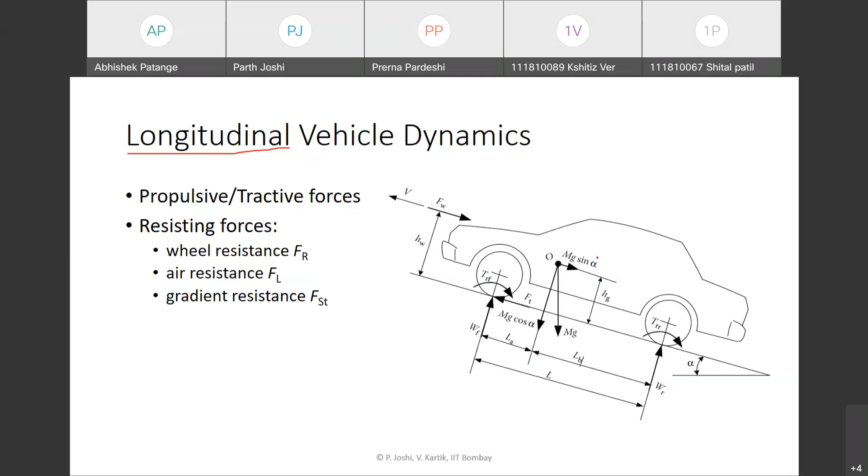So now we will see each of these forces in more detail. First we look at the wheel resistance, which is also called rolling resistance. It is basically the resistance to the pure rolling motion of any wheel. This force arises because of the particular material behavior of a tire. Tires are made of rubber, which is a viscoelastic kind of material, and because of this particular behavior and deformation of the tire, this force arises.

So normally if we have a properly inflated tire - sorry for the bad circle, assuming it's a circle - if it is lying at rest on the road, let us say this is one of the tires and the vehicle has four car tires, then there will be a certain portion of the tire which is in contact with the road. It will be a small area of the tire which is slightly flattened out, the way it is shown in the picture.

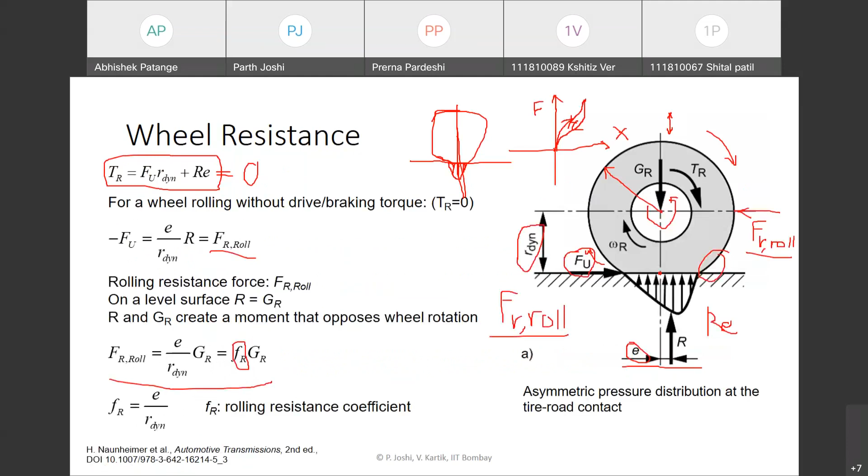So from the previous derivation, if we similarly try to derive the rolling resistance force, it will come out to be Fr into mg cos alpha, which is the component of the weight along the direction normal to the inclined plane.

This rolling resistance coefficient is found to be approximately constant for low speeds. Normally we do not encounter very high grades, so generally the road slope is gentle, and the gradient is expressed as a percentage, basically tan alpha expressed as a percentage.

So if the grade is generally 10% or lesser, the value of alpha is about 5.7 degrees. Because of this small angle, the value of cos alpha is nearly 1, so for practical purposes, we can ignore this effect if it is a gentle grade.

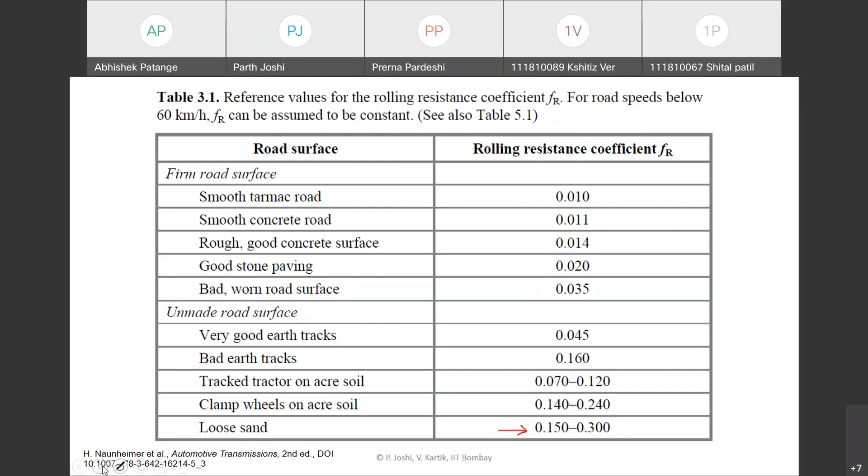So can we proceed? Yes, sir. Okay. Yeah.

So another force is the air resistance. When a body moves through any fluid, let's say if a car is moving through air, then while moving through the air, because of the motion and the particular shape of the vehicle, there is a certain amount of air that is being displaced, so the vehicle pushes some air aside.

Let's say the air was pushed out when the vehicle was here, then the air was pushed out. When it has moved forward, this air will try to come back into that zone. So then there is a kind of vacuum, or a low pressure region created on the backside of the vehicle, whereas the air in front is pushed forward, creating a higher pressure zone, like it compresses the air.

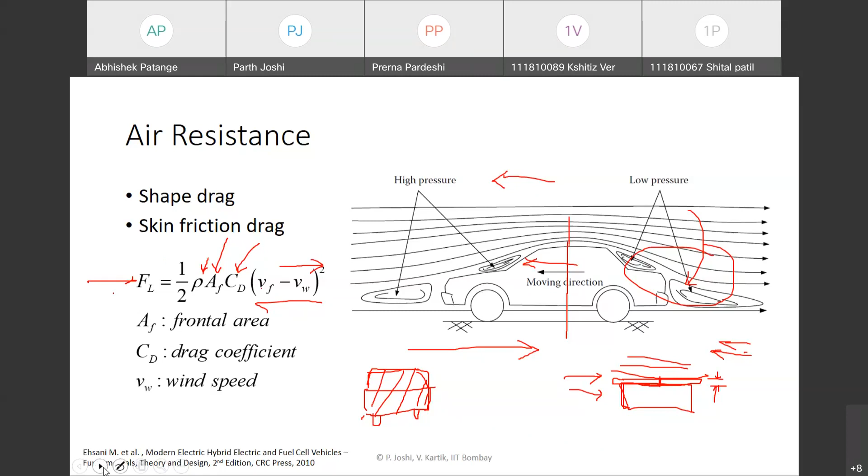If we look at the typical values of the drag coefficient for different kinds - let's say if it is a motorcycle with a rider, generally the drag coefficient will lie in the range around 0.5 to 0.7. If we have a flat plate, which is opposite in direction, then the drag coefficient associated with this is nearly 1.

If we have a small, smooth geometry and a small frontal area, then you would generally tend to have a lower drag associated with that. So generally companies try to make the shape of the body as aerodynamically efficient as possible.

So let's say we consider vehicles like passenger cars - Mercedes or Porsche. They have a relatively lower drag coefficient, like about 0.3 or so.

Whereas buses generally have a flat plate kind of geometry. If we look at the frontal area, the drag coefficient would be substantially higher, up to about 0.8 or so, because of the kind of box type shape that the bus body has. So these are the typical drag coefficient values for different categories of vehicles.

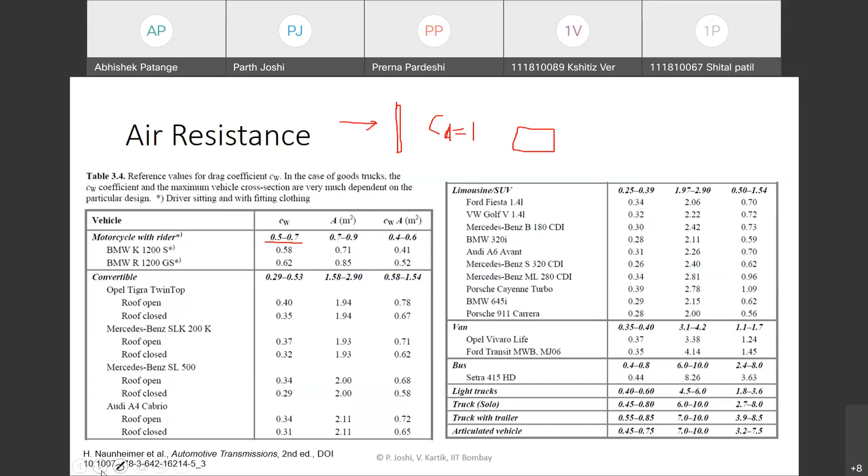So another force that we encounter is the gradient resistance. When the vehicle moves along an inclined road, let us say alpha is the angle of inclination. The weight of the vehicle would always act in a vertically downward direction.

If we resolve the force, like the weight, in a direction normal and along the inclined plane, there is the component of the weight which is along the direction of motion, which is mg sine alpha. In this case, because it is moving up the road, the component of the weight is actually opposite to the motion, so that also causes some resistance to the motion.

If the vehicle was moving downhill, then this particular component of the weight will actually act in the direction of the motion, so this will actually assist the motion.

So these are some typical gradients that we encounter, these are for Europe. These are the maximum road gradients that we can encounter in some of these countries like Germany or France. There are some cases where there are steep slopes like 26%, but typically even a gradient of 10 to 12% is also considered very high for a vehicle to climb.

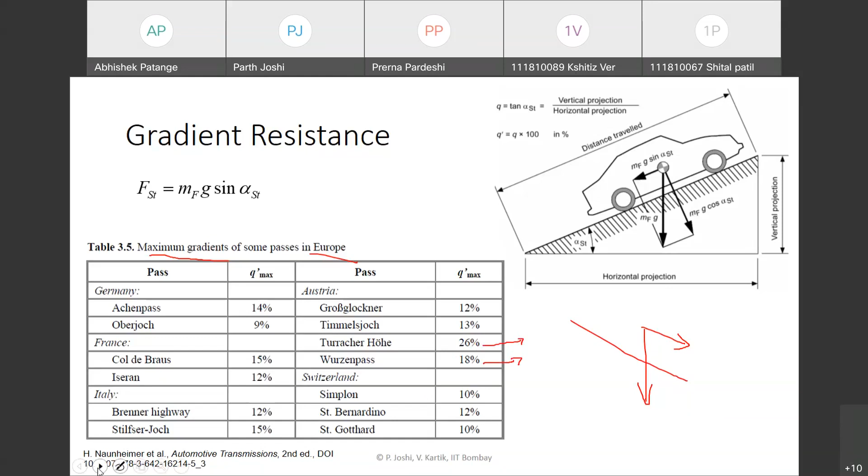So now, till now, we have seen what are the resisting forces, which includes the wheel resistance or rolling resistance, then the force due to the gradient, and also the air resistance.

Now, if we try to write the equation of motion of this particular vehicle, we will apply Newton's second law. Here we consider this vehicle as a lumped mass with some mass m. So the mass into the acceleration will be basically the net force acting on the vehicle, which is the difference between this tractive force acting at the wheels, which arises due to the power source, and the resisting forces.

So here we introduce a factor lambda. Since we are considering this particular vehicle as a lumped mass, we also incorporate the effect of inertia of rotating components. There is certain amount of inertia and certain amount of work done in rotating these components like the IC engine, transmission, and differential, and there are many rotating components throughout the vehicle, throughout the drive line.

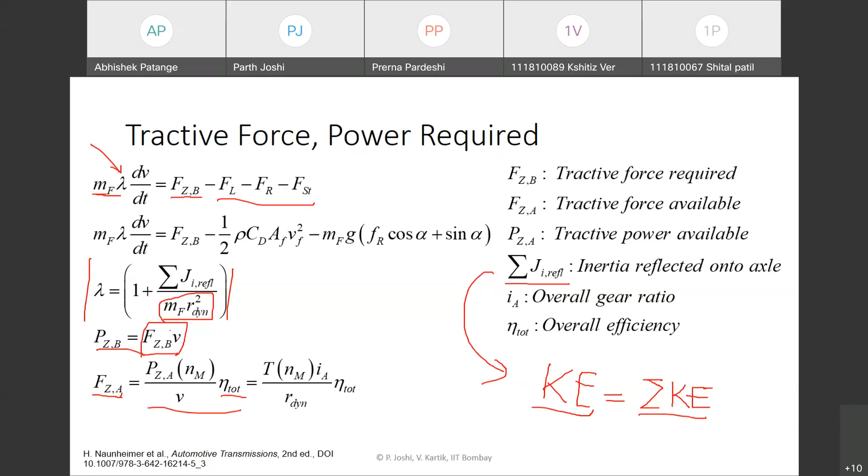This gives us an idea of how significant the effect of inertia is in different gears. In the first gear, the gear wheels required to provide the higher gear ratio are substantially bigger, and that has a higher inertia associated with it. The inertia scales as mass into r square, so as the size of the gear increases, the inertia will significantly increase. For the lower gears, the inertia effect is much more significant, whereas for the higher gears, let's say fourth gear or even fifth gear, the inertia may not be that significant.

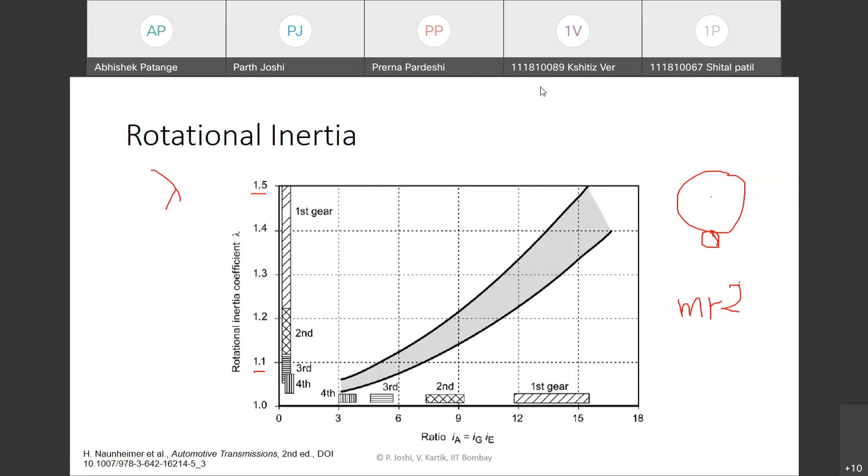Hello. No doubts, sir. No doubts, sir. Yeah, fine. Yeah, thanks.

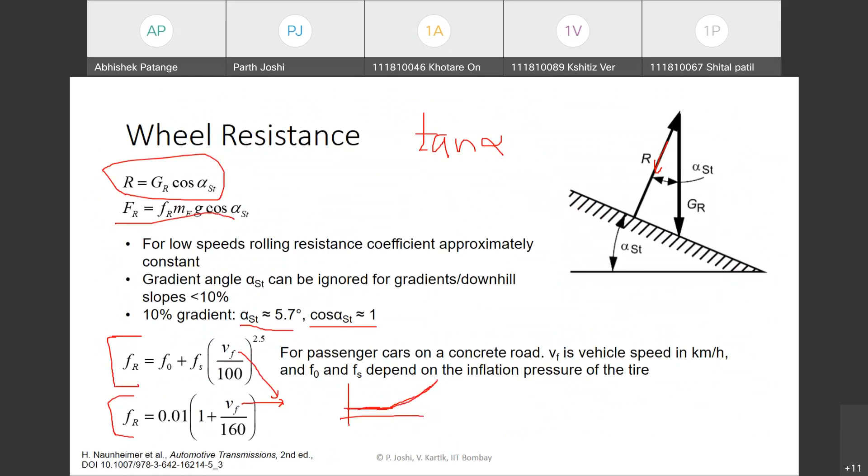The rolling resistance force is largely independent of the vehicle speed for lower speeds. But as we looked at the rolling resistance coefficient expression, for low speeds it's somewhat constant, and then later it increases rapidly with greater vehicle speeds. So that would be the nature of the rolling resistance force, this particular force Fr, let us say.

Then the air resistance force is directly proportional to V square, the velocity square. So there is a quadratic nature, a parabolic nature to the rate of increase of the air resistance. We can see that these kinds of curves are parabolic in nature.

With increasing gradient resistance, we will need significantly higher and higher amounts of tractive force required. For different grades, the gradient resistance will be independent of the vehicle speed. It only depends on the road inclination and the weight of the vehicle. We neglect the reduction in the weight of the vehicle as it moves at constant speed.

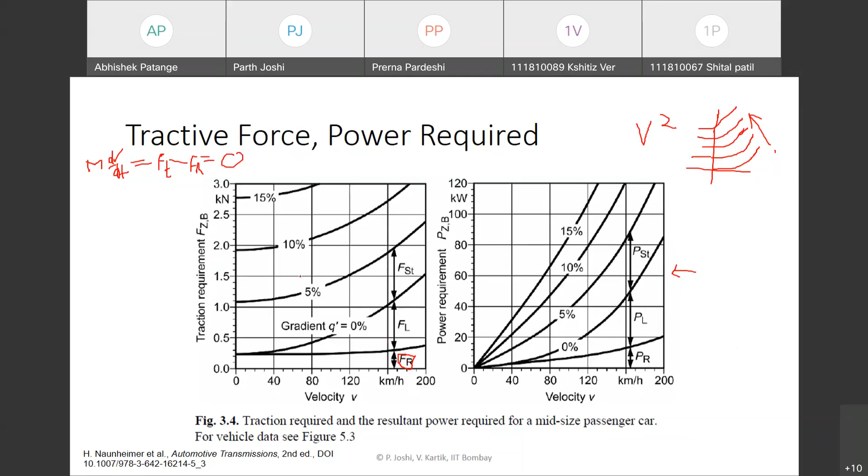So then the tractive force exactly balances the resisting forces. This plot basically shows this type of characteristic, so the sum of the resisting forces is what is being provided by the power source.

As I mentioned earlier, there is a maximum force that can be transmitted by the tire and road surface, through the contact patch between the tire and road surface. It can withstand a certain amount of maximum force, which is governed by the adhesion limit. There are adhesive forces at the contact patch which are responsible for this particular propulsive force.

This particular limit of adhesion is given by a tractive force coefficient, or static coefficient of friction. Normally we will have the static wheel radius, which is the distance from the center of the wheel to the road contact plane when the wheel is at rest. And we have a dynamic wheel radius, as I mentioned earlier - the distance from the axis to the tire road contact patch.

So we have a phenomenon called slip, because of the deformation of the tire material. If it is a freely rolling wheel - let's say a rigidly rolling wheel - traveling on a certain flat road, assume there is no slipping. The velocity of the center of mass would be r into omega, where omega is the angular velocity of this wheel.

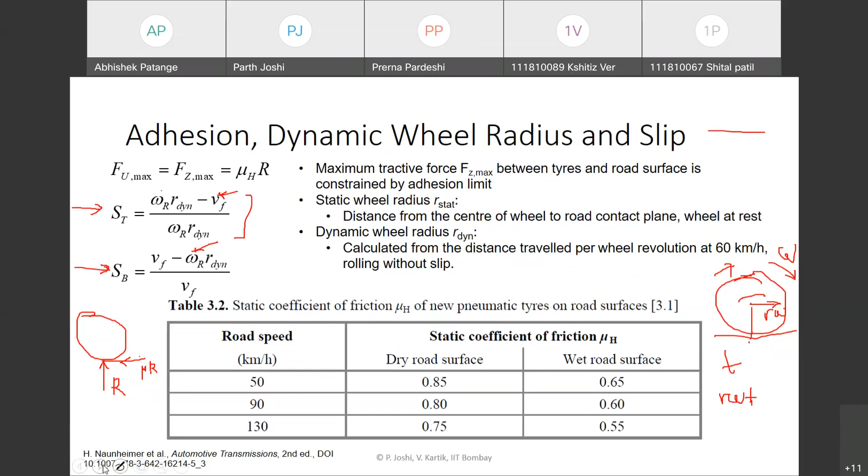So for a dry road surface at a certain speed, let's say 50 kilometers per hour, the static coefficient of friction is about 0.85. Depending on the nature of the road and the speed of the vehicle, this coefficient of friction will vary.

So when the tractive force requirement for a certain vehicle speed exceeds whatever can be supplied because of the adhesive capability, then the wheels will start slipping on the ground. This is especially observed during the rainy season when the road becomes wet - we can see that the tires actually start slipping, and even on icy roads or snow covered roads, or on sand or soft roads. Those kinds of roads do not have much capability to supply tractive force, so because the road cannot support much traction, the wheel starts slipping.

Similar to the rolling resistance phenomena, the tire tread, because of the particular motion of the wheel, gets compressed in the front, whereas the tire treads behind are being released or unloaded. This asymmetric pressure distribution gives a corresponding shear force, shear deformation in the side walls of the tire.

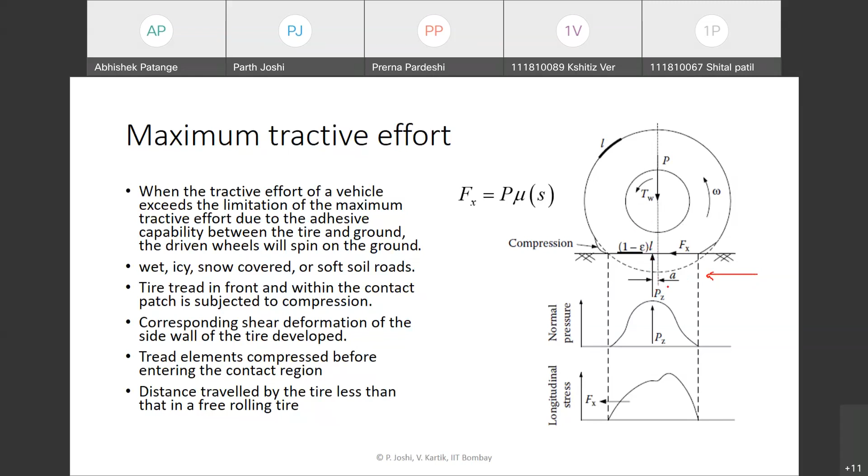This gives rise to the force Fx, which is the tractive force. Because of the asymmetric pressure distribution, we get this tractive force along with a shear component, and also an eccentrically displaced force component Pz, which is displaced by a distance a from the axis.

This is associated with the linear elastic deformation of the tires.

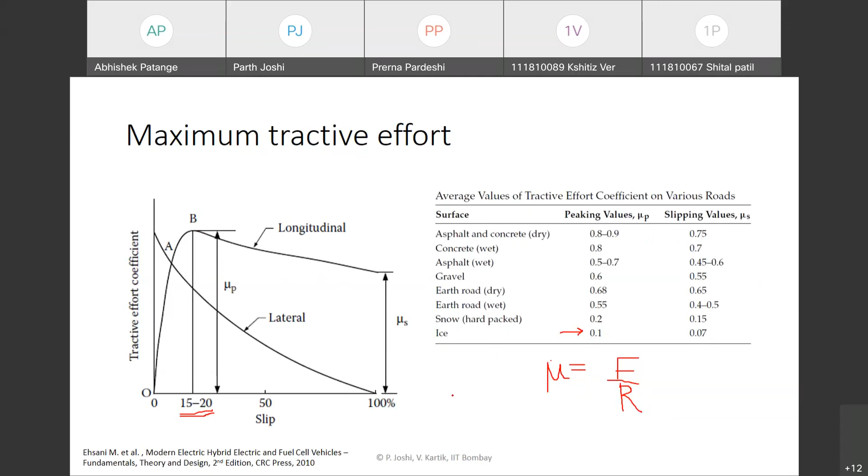So we saw the different propulsive and resistive forces. If we combine them into this equation of motion, this is how we get the overall equation of motion.

Up to this point, are there any questions or doubts?

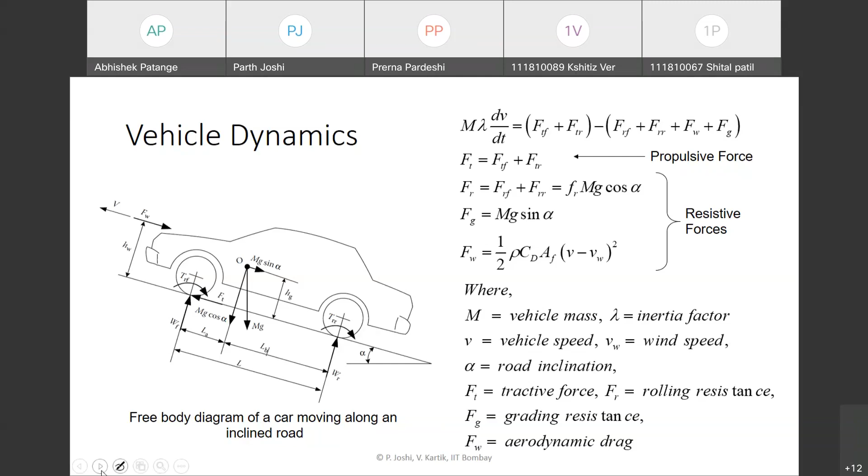If not, I'll give you an activity. Let us derive the expressions for the axle reaction forces. Let us say this vehicle is moving along this inclined plane, and you can consider the notation given in the figure. I hope this figure is clearly visible to you.

We just saw what the different forces acting on the vehicle are, and the resisting forces as well as the tractive forces are shown in this figure, along with the reaction forces: WF is the reaction force on the front wheel, and WR is the reaction force on the rear wheels.

So now the task is to derive the expressions for these axle reaction forces, and then find out what are the expressions for the maximum tractive force for a front wheel drive as well as a rear wheel drive vehicle.

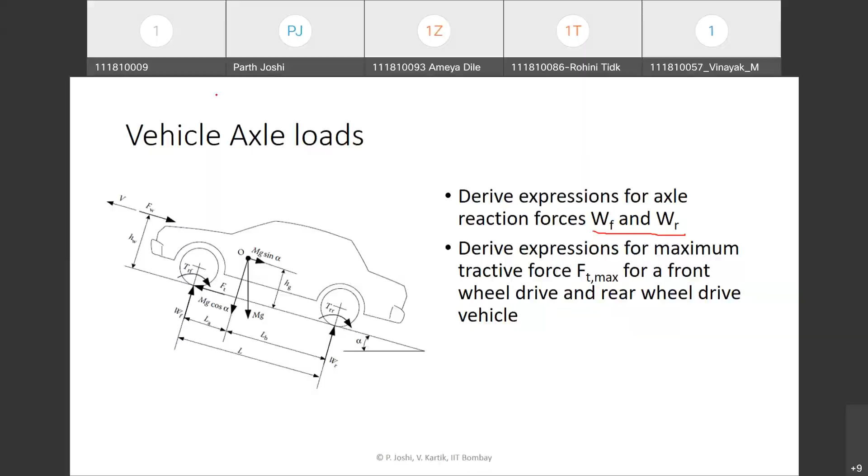I'll just stop sharing from my side. Sir, actually I've joined by mobile, so I can't, and I've written the solution. Okay, I'm just asking if you can take a photo of whatever you have solved. Just a moment, and then share it, or if you can share it on the chat, then I can share your solution. I'll do it as well, sir, yes.

So either you can share your own screen with the photo, or if you can use your web camera to show your solution, any way is fine. Yes, sir.

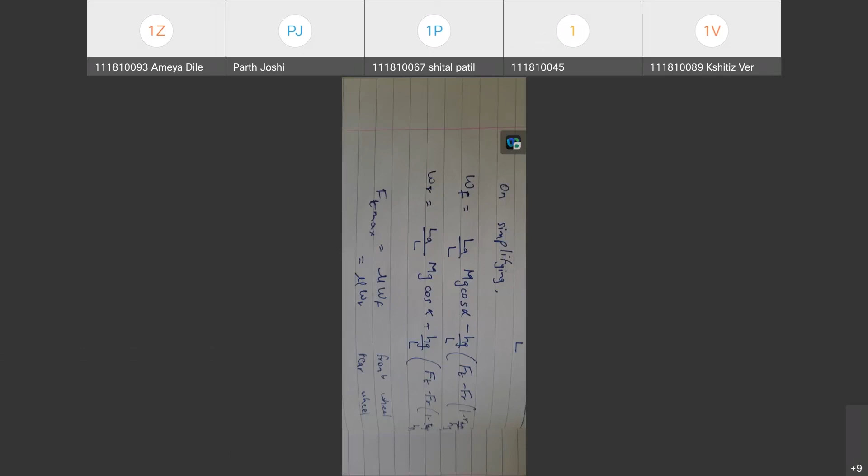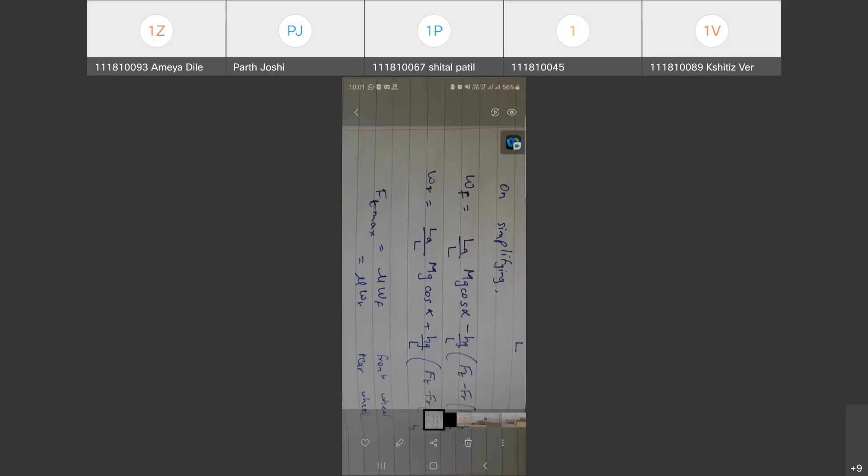Sir, can you see my photo? Hello? Yes, yes, I can see your solution. Can you rotate it if possible? Keep the screen rotation on or something. It's visible, but it's rotated. Just a minute, sir. Okay. Sir, now is it okay? Yes.

It's rotated, but if you hold your phone horizontally, will it auto rotate? This is okay. Right. Right.

Correct, correct, right. So can you explain how you derived these expressions? Sir, first I took the sum of all the forces - the rolling resistance, grade resistance, aerodynamic, and all these resistances. Then I used the momentum equation, m dv/dt is equal to the summation of all the forces, algebraic summation of all the forces. And then I simplified it.

And then for this WF and WR, I took the moment - the resultant moment at R, where the tire and the ground meet. At that point I took the moment, and then on simplifying, I got this equation. Right, right, right.

Correct, correct. And what about this maximum tractive force? So that is just the product of coefficient of friction and the normal force - mu will be given, and WF is the above expression. Correct.

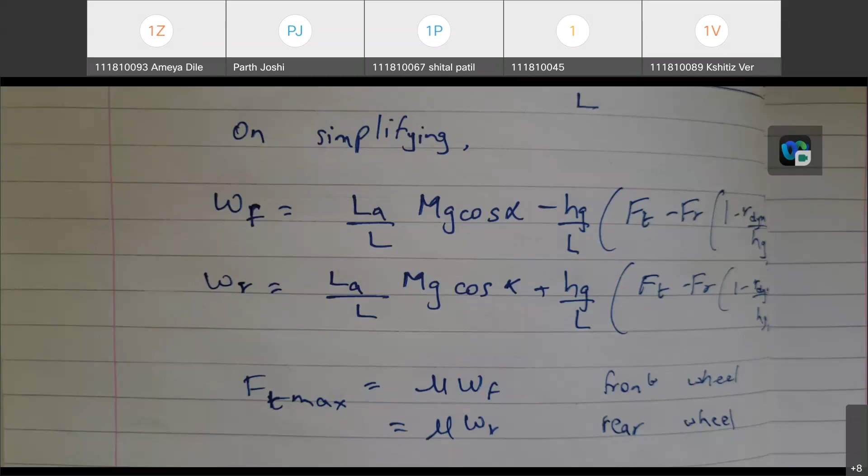So very good. That's the nature of the reaction forces that Shital has shared.

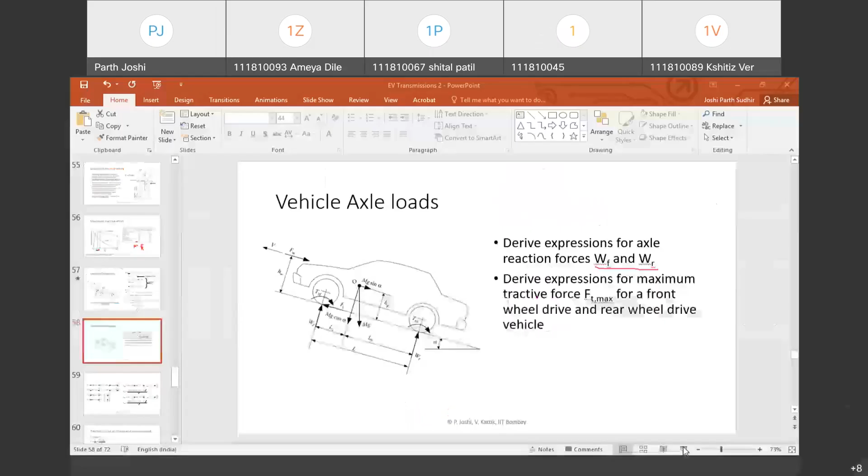As you rightly said, we need to take moments to derive the axle reaction forces, so we can simplify it to these expressions, which is exactly what you derived.

And for the maximum tractive force, for a front wheel drive, the tractive force will be acting on the front set of wheels, so it will be mu into the front wheel reaction forces. And for the rear wheel drive, it will be for the rear reaction forces.

So as I mentioned, there will be a tractive force term over here on the right hand side, so we need to simplify this further. So we get this maximum tractive force expression for the front and rear wheel drive.

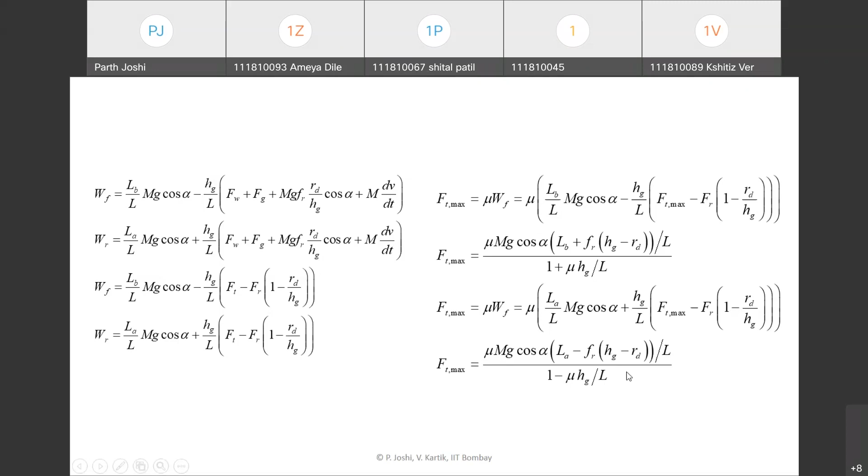So if we now calculate the tractive torque at the wheels and what will be the vehicle speed, if you have to express it in terms of the power source, like the torque that is provided by the power source, and the vehicle speed as a function of the speed of the power source, so we can derive some simple expressions.

So let us say IG is the gear ratio of the transmission and I naught is the final drive gear ratio, which is just in front of the differential. So that's the total gear ratio. I naught is the final drive gear ratio, IG is the transmission gear ratio, and eta PT is the powertrain efficiency.

So if TP is the torque output of the power source, let us say either it can be an IC engine or an electric motor or anything, we can write this kind of an expression for the torque that we will observe at the wheels. And the tractive force will be this torque divided by the dynamic radius of the wheels.

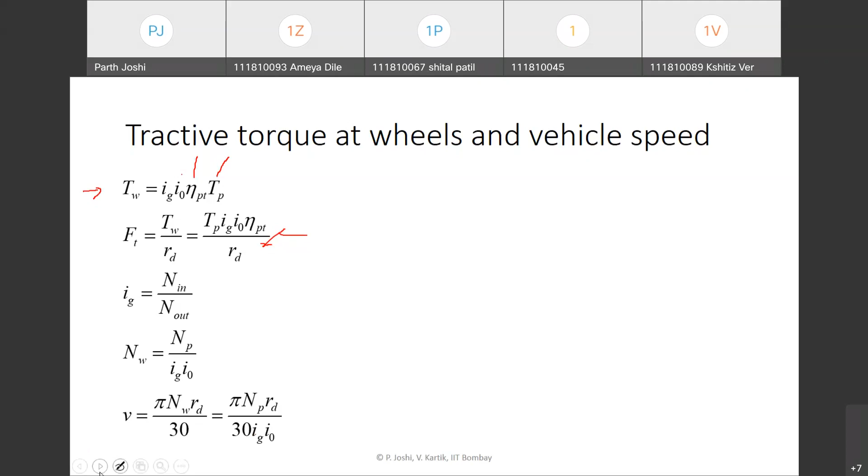Now we'll look at some vehicle performance metrics. So we looked at how we calculate the overall tractive force and what are the different resisting forces.

Now, as a result of that, there is a certain maximum speed limit of the vehicle. Considering the different gear ratios that are available, and for different speeds, considering what is the maximum power or maximum tractive force that can be supplied with respect to the vehicle speed.

So we can derive the tractive force requirement, and we also know how the maximum tractive torque varies for the power source. Let's say for an IC engine, we know the torque and speed curve, the maximum torque speed curve for the IC engine, if that is given, and we also know the gear ratios of the transmission.

So as explained yesterday's session, we saw how we can superimpose the overall tractive force available versus vehicle speed for every gear. So we calculate the equivalent torque that is available at the wheels for a certain vehicle speed. So we can plot the curves for each of the gears. Let us say we have 4 gears, then we can generate plots like this.

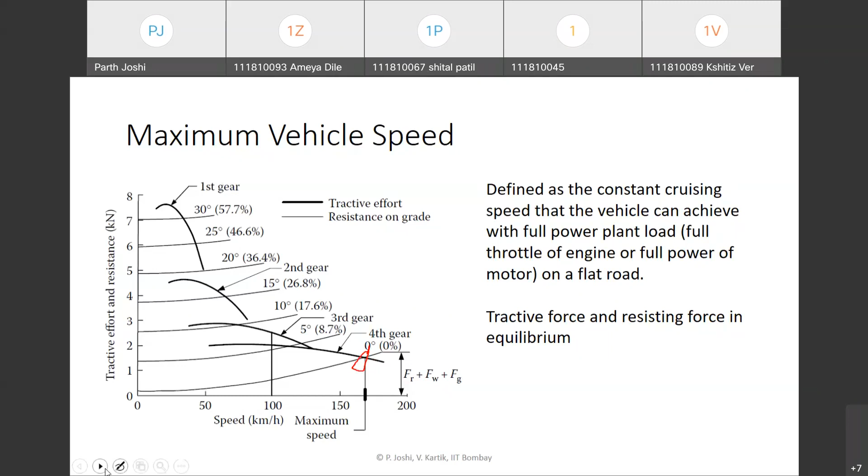So if we have to derive an expression for what is the maximum vehicle speed, we will equate the tractive force with the sum of the resisting forces. We get the expression for total tractive force in terms of the IC engine torque here, and we know the various resisting forces, the road gradient, so we have a function in terms of v square.

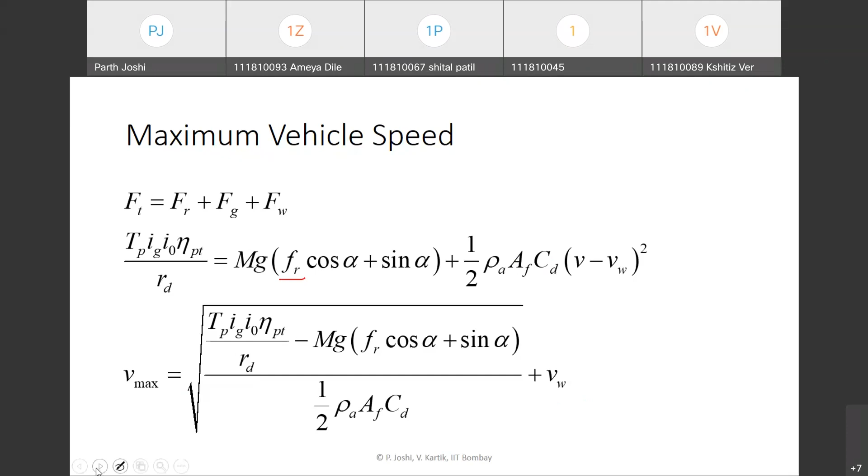So this particular term will vary with vehicle speed. Let's say we assume that the rolling resistance coefficient is a constant for now. Then we can derive an expression for maximum vehicle speed, which looks something like this. Because of the quadratic nature, we get the expression for maximum vehicle speed as a square root of the net resulting tractive force minus the rolling resistance force and the gradient resistance. So this is about the maximum vehicle speed.

Another important metric - yeah, so before we move on to the next metric, for the maximum vehicle speed, we derive it as the intersection point between the tractive force required and the tractive force available, those two curves, right? So what if there is no intersection point between the tractive force required and the tractive force available? Then how will we define the maximum vehicle speed? Any guesses? What will we do in that case? Any answers on that?

So Kshitiz Verma, do you know what we need to do if we do not find an intersection point between this tractive force required and tractive force available curve? Sir, I think then we'll be using available tractive force to calculate.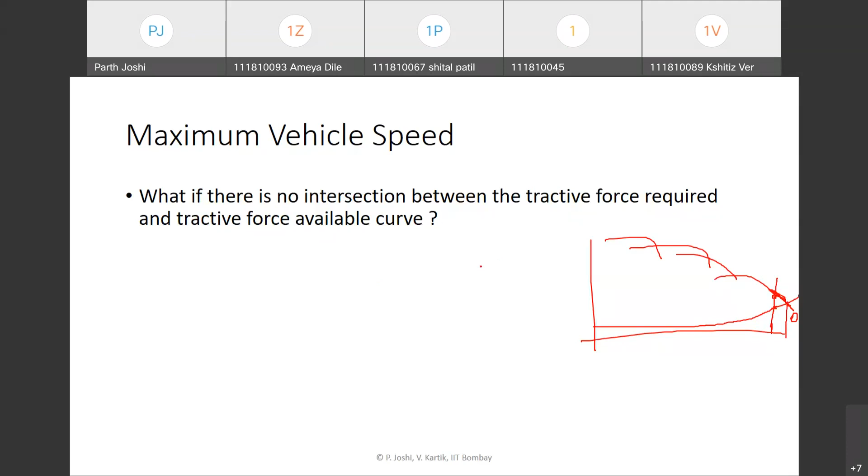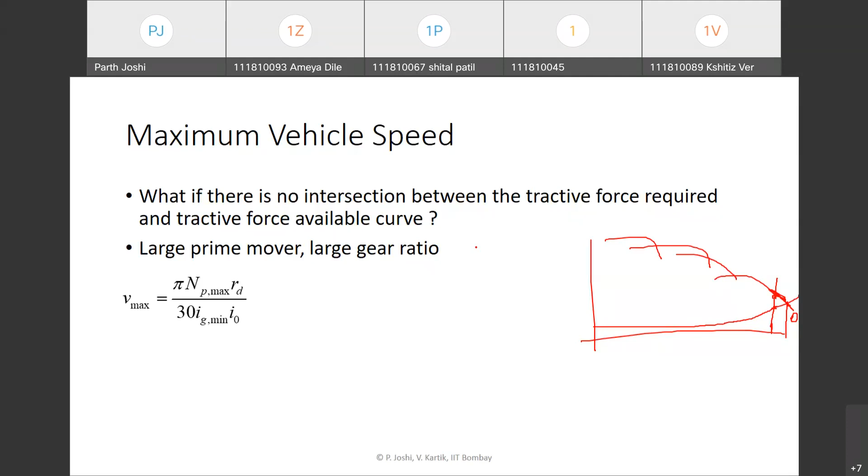So if there is no intersection point, then we will just go by what is the maximum vehicle speed achieved at the highest gear, or the lowest gear ratio, considering the engine is supplying maximum torque at its maximum speed. So that will be the maximum speed in that case. Does that make sense? Yes sir, okay.

Now another important metric which is called gradeability. Is anyone of you already familiar with this term?

So gradeability is basically the road grade or grade angle that the vehicle can overcome while moving at constant speed. It's an important vehicle specification, especially for heavy commercial vehicles or off-road vehicles. It's defined as the maximum grade that it can overcome over its entire speed range. That's an important performance specification for this category of vehicles.

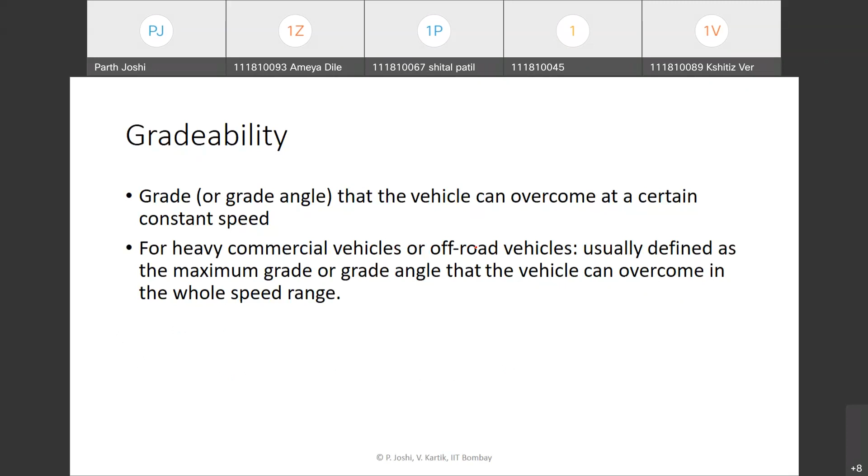So how do we derive the expression for gradeability? Since the vehicle is moving at constant speed, there is no acceleration. If we go back to the equation of motion and equate the acceleration to zero, we get that the tractive force is in equilibrium with the resisting forces. On the left hand side, we get the tractive force in terms of the power source torque output, and on the right hand side, we have the resisting forces.

So what do we have to derive over here? We have to calculate alpha. For a given vehicle speed at full throttle, what is the maximum grade the vehicle can climb? We know the vehicle speed, the output torque of the power source, and the gear ratios. So we know the maximum torque versus speed characteristic, and the tractive force or tractive torque available versus vehicle speed. For the given vehicle speed, what is the maximum grade that it can climb?

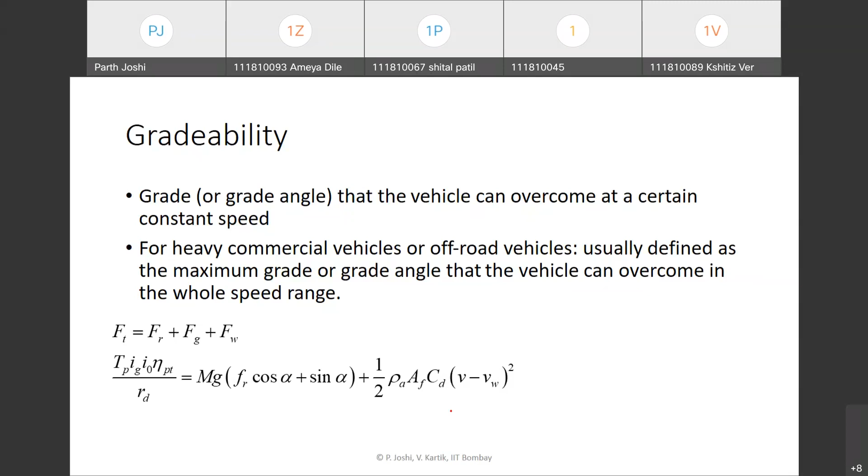So to derive that, we have to basically derive an expression for alpha. How will we derive that? Here we just need to do some trigonometric manipulations.

Let us say we substitute tan beta equal to Fr, which is basically the rolling resistance coefficient. Then we get cos beta equal to 1 upon square root of 1 plus Fr square, and sin beta will be Fr upon that same square root of 1 plus Fr square.

So then we get this expression. If we divide and multiply by root of 1 plus Fr square, it becomes sin alpha into cos beta plus cos alpha into sin beta, which is the same as sin of alpha plus beta. So we get the expression on the right hand side as mg into root of 1 plus Fr square into sin of alpha plus beta, equal to this particular difference.

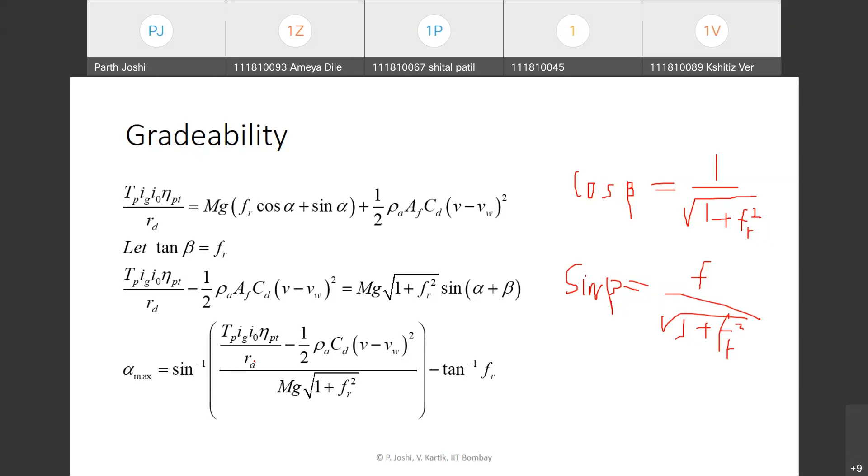Another performance metric is basically the acceleration performance. Acceleration performance is reported as the time required to accelerate between a certain given set of speeds, let us say from 0 to 100 kilometers per hour at full throttle. This is commonly called WOT, wide open throttle. So at full throttle, what is the time required to go from 0 to 100 kilometers per hour, or let us say 30 to 50 kilometers per hour? That is how it's generally reported in industry for different vehicles. It's an important performance specification.

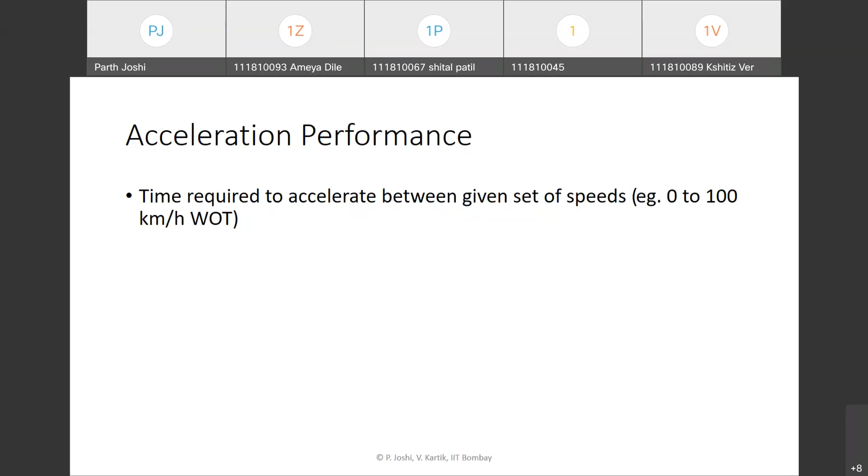So how do we calculate this acceleration performance? Again we come back to our equation of motion, where we express acceleration in terms of the tractive force and resisting forces. Now what we have to derive is basically the time. If we further simplify this expression in terms of the tractive force and resisting forces, we get that same kind of expression.

But now what we have to do is, how will we derive the time required now? Any guesses? Any answers on that? What do we have to do to derive the time required?

So Vinayak, can you answer that? What do we have to do to get the time required to accelerate? Sorry for the disturbance, sorry for the background noise. So anyone has any idea how do we derive the time required? Vinayak, sir is asking some question. Kshitiz, Ameya, Aishwarya, please answer.

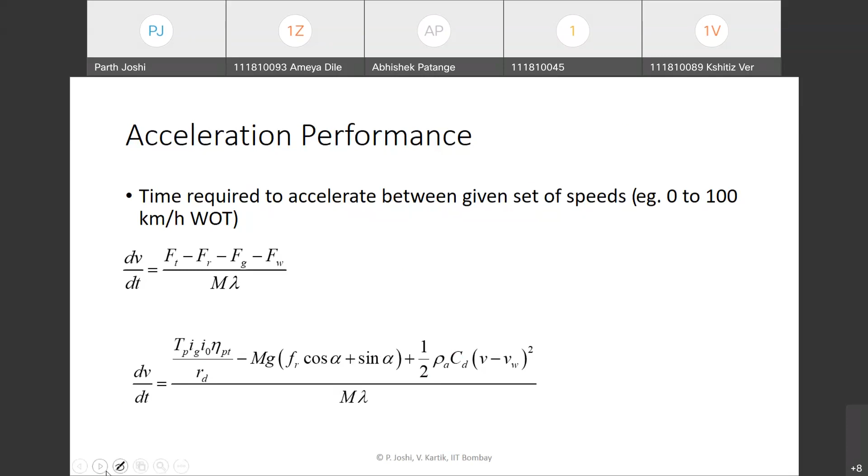So we can integrate this expression, so for the time required to go from a certain vehicle speed v1 to v2, we can write it as this expression. Similarly, we can also calculate the distance s. For a certain time dt, the distance traveled will be v into dt. Since we know the expression for dv by dt, we multiply by velocity to get this expression. So this is how we can calculate the acceleration performance in terms of either the distance traveled or the time taken to accelerate between certain set of speeds.

This acceleration calculation may not always be easy to perform because the torque versus speed availability is different for different gears. As the vehicle accelerates to higher and higher speed, we also need to know at what speed the vehicle will shift gears, so we need to perform a certain complicated numerical integration to evaluate this. So any doubts on this?